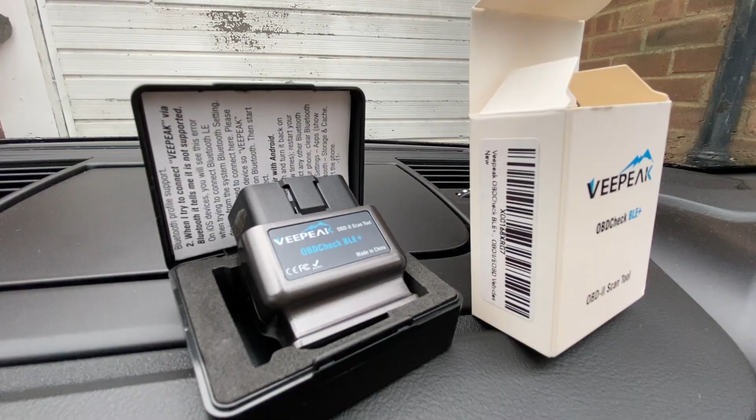From the video I did for the VEEPEAK diagnostic tool for the other two cars, the Land Rover and the Renault, a few people have asked would this work on the Giulietta.

Normally what I use is the multi-ECU scan tool, connected to the laptop through the leads, out the back of the OBD port down here. But I thought for now, let's give it a go and see what we can do. This is obviously quite a cheap tool, only about 30 quid I think, something like that in the sales, or £40 something full price. So what do you get, value for money? Will it work on your Giulietta? Let's have a look.

Just as I did in the previous video, I'm going to have to use this phone that I'm using for videoing for the diagnostic app. So basically I'm going to need to screen record on this phone, and then what I'll try and do is narrate over the top of it.

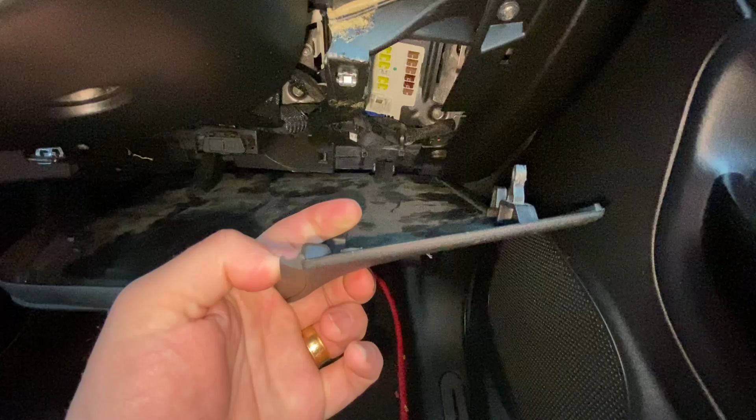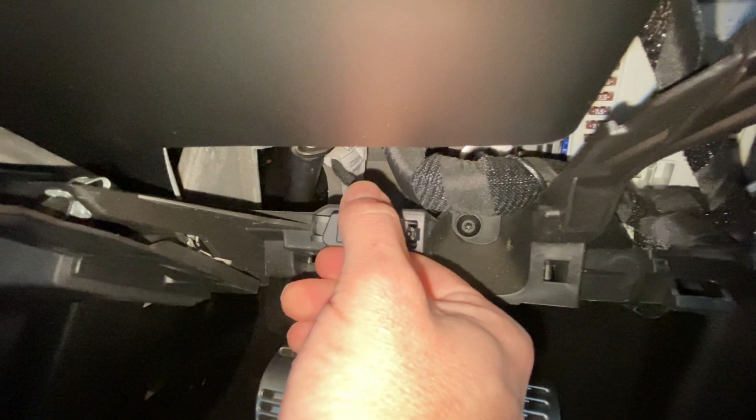Okay, so firstly let's get the tool plugged in. Down here by your knees, you've just got this panel with 1, 2, 3 clips. I've actually already removed mine once already, so I'm just going to pull this away. There you go, you can see where those clips go in, 1, 2, and then the third one just over there. They go into those kind of silver retainers, and then that just comes away. And then hopefully you can see just there is where the cover for the OBD port is.

So what I'm going to do now is just open the app and add this car in. That's the first step we're going to do - go into the app and add the new car.

Okay, so we're using the car scanner app. Top right, go into settings, and you can see the top option here is my cars. We're just going to tap on that, and you can see the 2 existing cars that we set up previously. Top right again, we've got the plus button.

So we're going to click on plus, and then the first thing we can do is just give it a name. We'll conveniently call this one Giulietta. The second point we need to do is just add on the year, so ours is a 2011. Once you've done that, just tap on the car to highlight it grey, and then we should be able to select car, and that will take us back to the menu.

Okay, great. So with the car added, what we're going to do now is just take the key and get it in the ignition, turn it on. Just to that point, we're not going to start the engine, we're just going to leave it there, and now we can go back into the app and configure the connection settings.

Okay, so the first thing we need to do is then just go into the connection settings. So Bluetooth LE is the option that we need for this dongle, connecting it through the iPhone. If you've got an Android, it's slightly different. The next one is connection profile, so we're just now going to click on that profile, and that's where we set up the car.

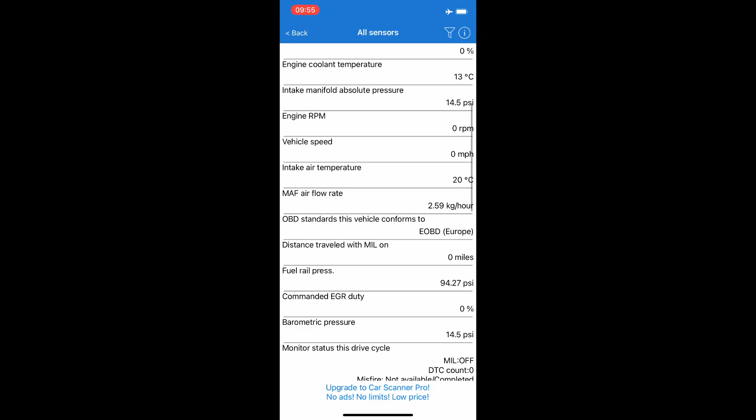Coolant temperature and all these strange random things, bits of information, useful statistics that we can see coming in, and the other points that we've got as well about fuel consumption being used and all those sorts of good things.

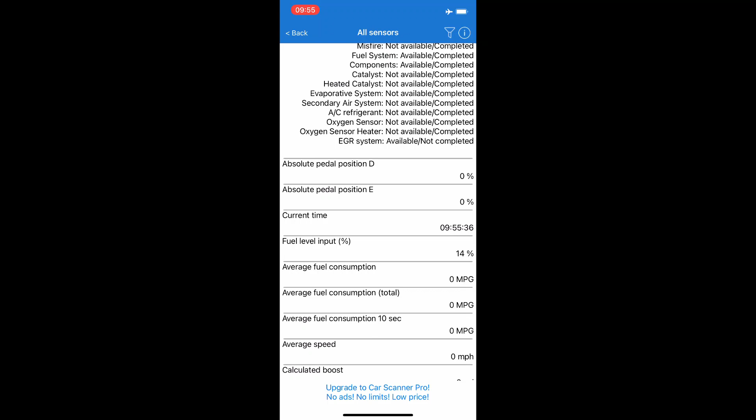Current time there as well, 9:55. I believe that's taken from the app and not from the car, because it's actually slightly 1 minute off in the car at the moment.

You've got the option there as well of distance to empty and calculated cost of the fuel used and price. What you can actually do is go into the app and add in the cost of the fuel that you're putting in, and it will actually work out for you the cost of a particular journey.

Next one, middle left, diagnostic trouble codes, or DTCs.

So this is the one that this tool is really all about. We're going to go into that now, select on the diagnostic trouble codes. That's where we're going to try and start looking at and reading any of those fault codes that you might have on the system.

On this one, it actually tells us what those fault codes are, what type you get - stored DTC, a pending one, or a permanent one. So we're going to go and just read it now. Bottom, and there it says read.

This is where it's slightly different on this one compared to the others. It's given us different sliding options, 1, 2, 3 or 4, about how far and how deep you can interrogate the car to understand what sort of information you're trying to see. For example, if you had a fault code up, you might interrogate it on this low level number 1 but it didn't give you any fault codes, so you might need to go up to 2, 3 or 4 as it comes up there, and it gives some messages about what it should and shouldn't be used for.

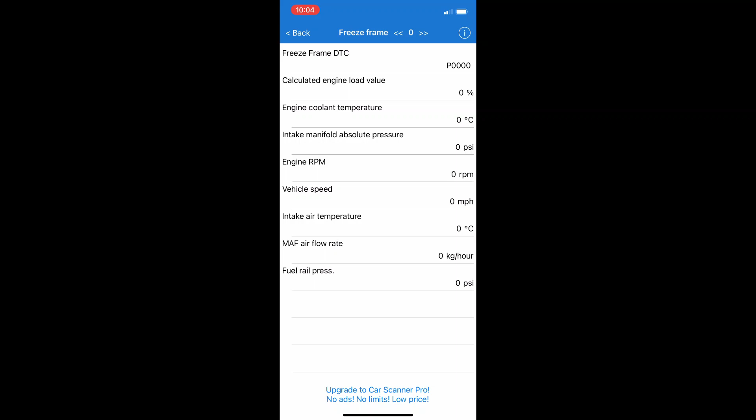Next one we've got is freeze frame. This is, as it says, about information on detecting any issues, and it will actually be able to provide you with the information that you've got up there. Because the engine's not running again, there's not too much information coming up.

Next one, middle right, non-continuous monitors, you can see it's reading down the bottom, the blue bar slowly going up. I'm not going to bore you with waiting for this blue bar to go all the way up to the end, and we'll come back out of that and go into the next one, which is acceleration tests.

So this one's quite interesting. This is actually live information for live acceleration. If you were trying to do a test, see how fast your car can go from 0 to any of those speeds, it will actually do it real time for you. As soon as you start accelerating, it starts counting up and stops automatically.

Next one, emissions tests. We can see here the components relative to the emissions, as they come through, what's passed, what's not passed. But I'm guessing some of these points aren't passed because the engine's not running, so there's none of that data coming in for it to look at.

The last one there is data recording. This is where it gives you information, or the stuff that you may have saved the files for before, on any of those other points. So that's all those up for now.

So what we can do now is just look to disconnect, I think, from the car, and we can then maybe start the engine perhaps. Just hitting disconnect, and there we go, we're now disconnected.

Okay, so having disconnected from the car, what we're now going to do is start the engine. That's all I'm doing now, just taking the key and turning it on, starting the engine so the engine's running. Once the engine's running, we're just going to hit connect again, as we've done there. Straight away it's given us a successful connection, which is fantastic. It's really good, straight into it really quickly.

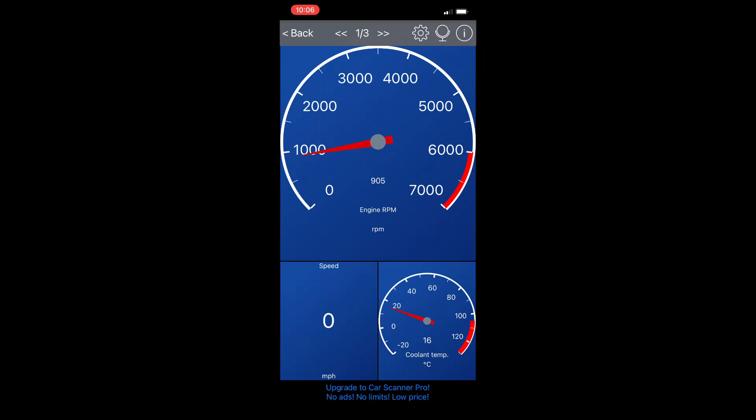And then we can go through again, top left onto the dashboard, and we can see a bit more live information because we're actually getting some interesting data. You can see the engine RPM there. If I just hit the throttle a couple of times, you can see that moving up and down.

Sliding left, a bit more information. Because the vehicle isn't moving, we're not getting any speed, average speed, or distance traveled. But if we were running with the diagnostic tool plugged in while driving, we'll be able to see that information coming in live as well. Sliding left takes you back to the first screen, and then just tapping on it we go back, and that takes us back to the menu.

Back into top middle, live data, clicking on the combine again. It remembers your last options, your last settings, should we say. So it's got those two, so we'll just leave those on. We can see here that obviously the voltage now looks a whole lot different.

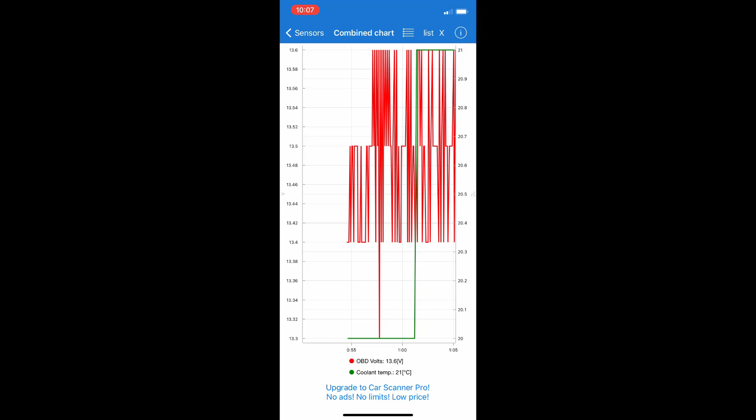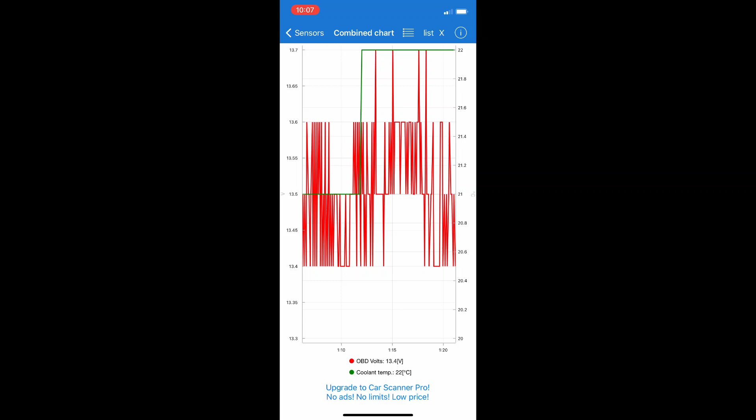It's not the 11.5 volts we had, it's getting more power to it with the engine running. As much as it looks like it's fluctuating like crazy, it's actually only going up about 0.1 to 0.2 of a voltage, so that's not too bad with the engine running. As more power comes in, or if we blipped the throttle driving fast, that would probably smooth it out to a much flatter line.

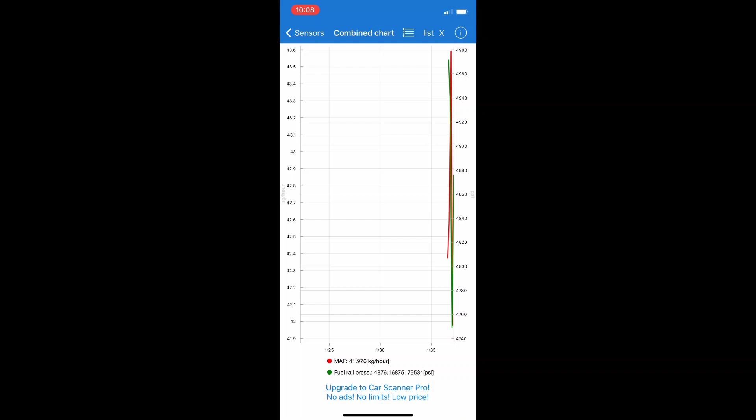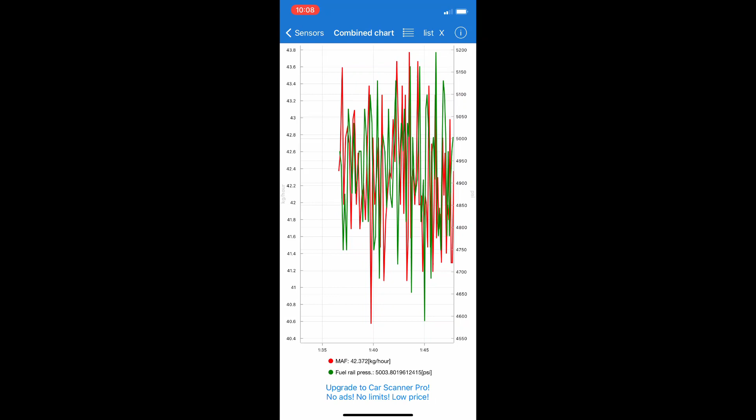Just deselecting those two, we'll look at another couple of options, remembering we can only select two at a time. So we'll look at the MAF airflow rate and the fuel rail pressure. Again, just like I was saying, the data coming in looks erratic as crazy as you like, because we're sitting there idling, so it's kind of a really zoomed in view.

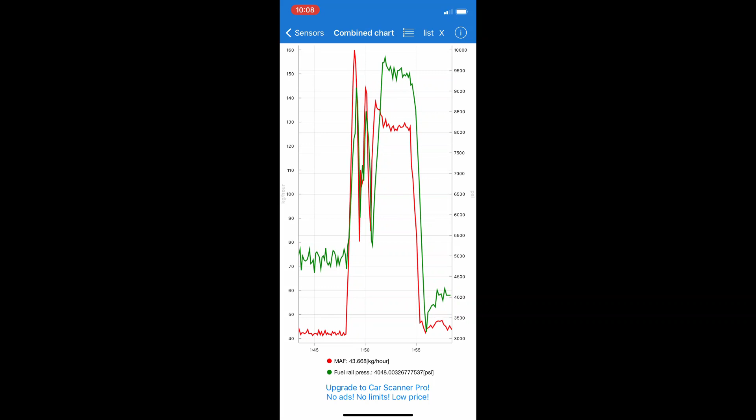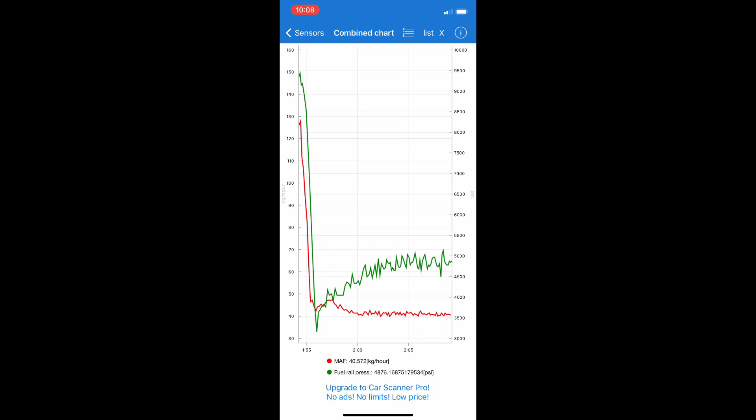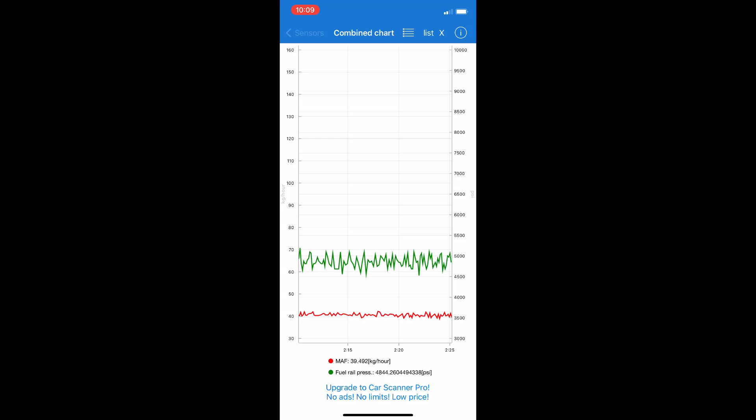As soon as you put some pressure on it, start to use the throttle and get some revs going, it's sucking more air in through the MAF, and you can see what looks erratic actually starts to smooth out, those lines come in. As the engine starts to warm up, some of the pressures start to build up. The MAF is fairly consistent with the amount of air coming in while it's just sitting and idling, but the fuel rail pressure has now built up to where it probably should be, and it's fluctuating just a little bit between those measures.

Turning those two off again, just coming down, looking at more options that we can potentially look at, something useful and interesting. We'll look at distance to empty and the fuel used.

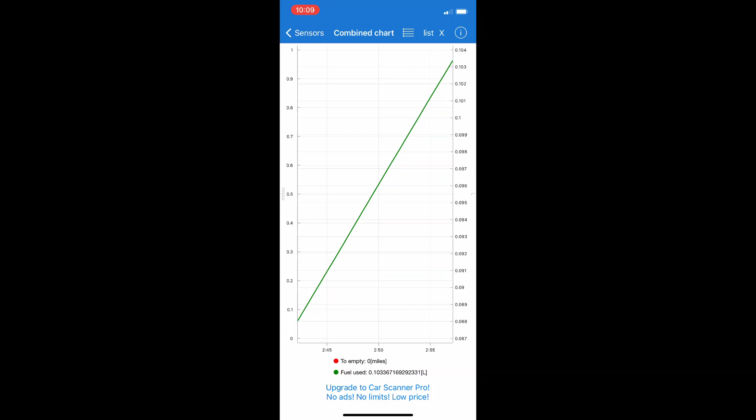So distance to empty isn't giving us a reading. Maybe that's because we've not got any costs or something like that in there, or maybe it's just not actually able to read it. And then fuel used, the longer the engine's running, we're using more and more fuel, so that's why that's going up as the time increases.

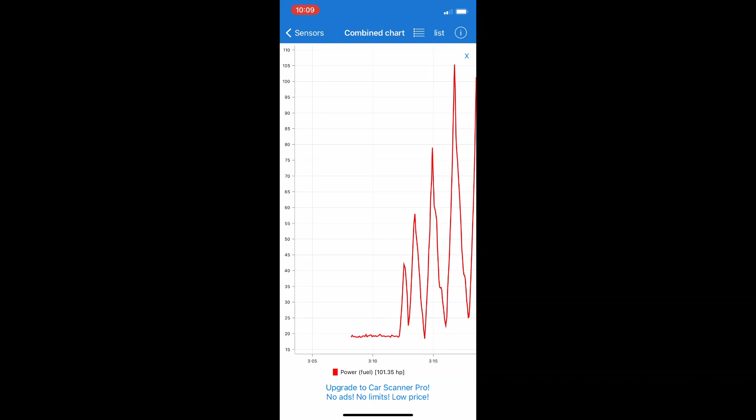Deselecting them, we'll just have a quick look to see what else we've got. I think maybe this one, instant power. So we can see here it's given us a horsepower reading. If I just blip the throttle a few times, you can see that power measure going up, showing how much power is being created.

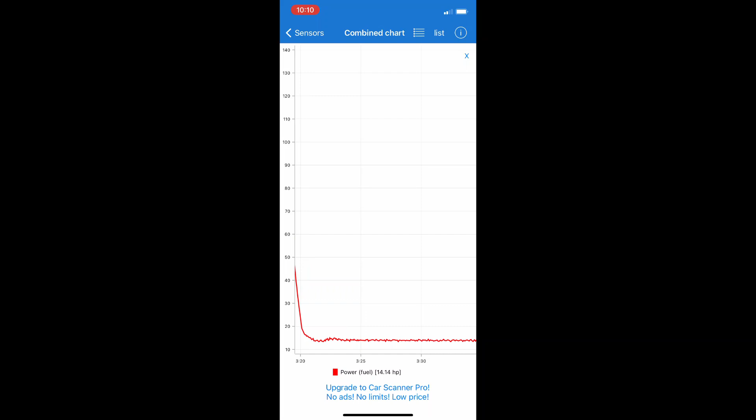How accurate this is, I'm not entirely sure. Obviously it's not going to give you information as live as sticking it on a rolling road for a dyno or something like that, but it's interesting to see the data coming in nonetheless. Try and give it one more little blip, a little bit harder, and up to, what do we get there, 150 horsepower. So that's kind of coming out of the car.

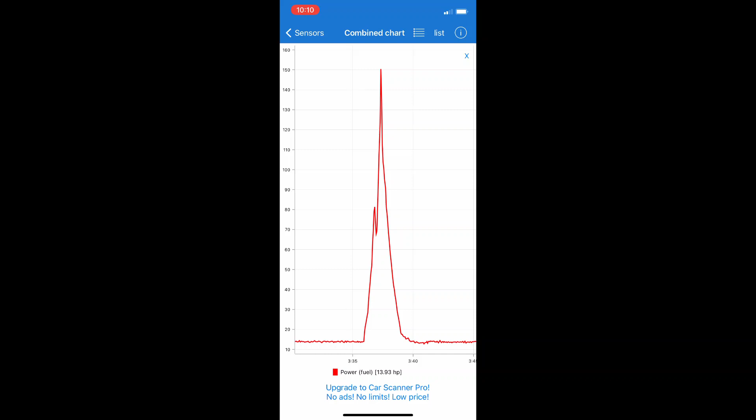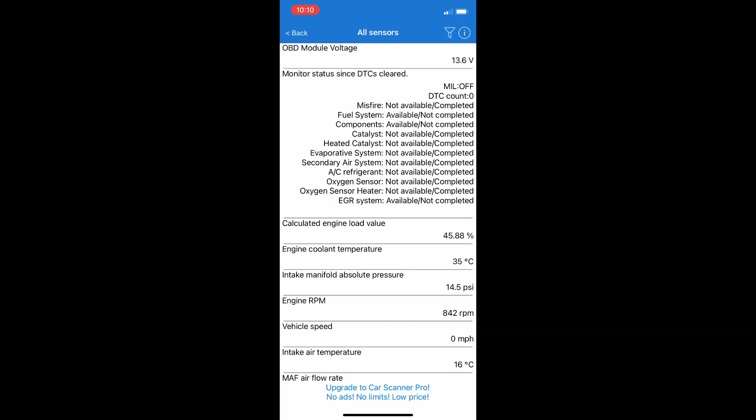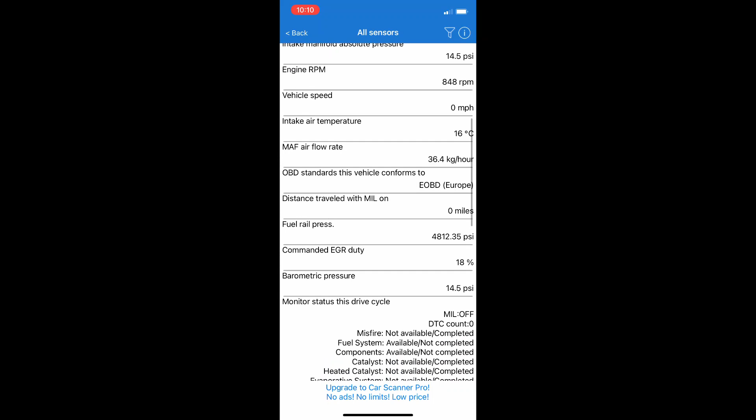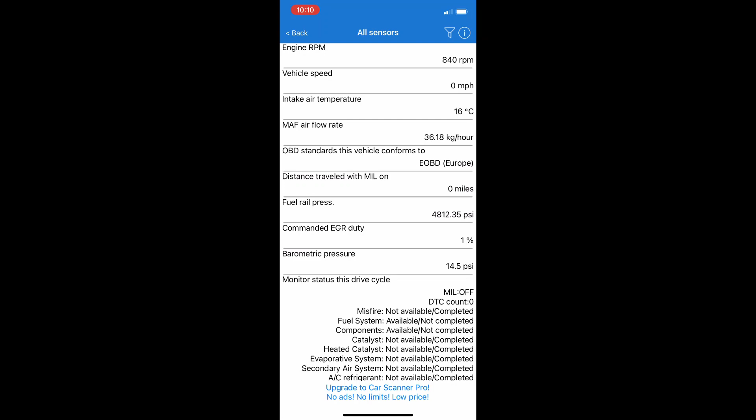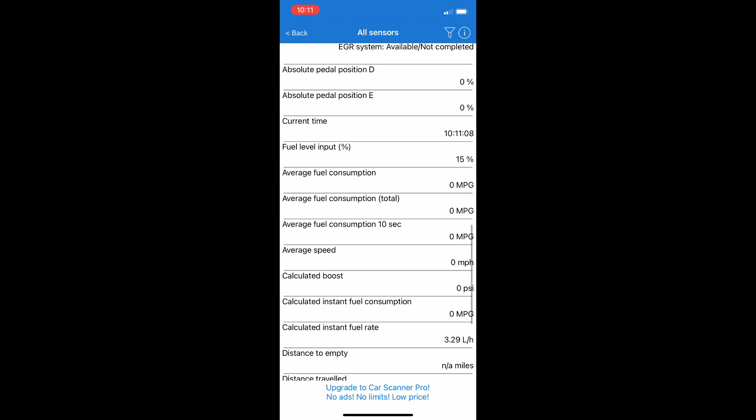You can see we've got a few more bits of information now coming in, again like the average fuel cost and so on, just as we looked at before previously. But like I say, the car's not moving, we're not going anywhere, we're not getting any of that real worthwhile data coming in.

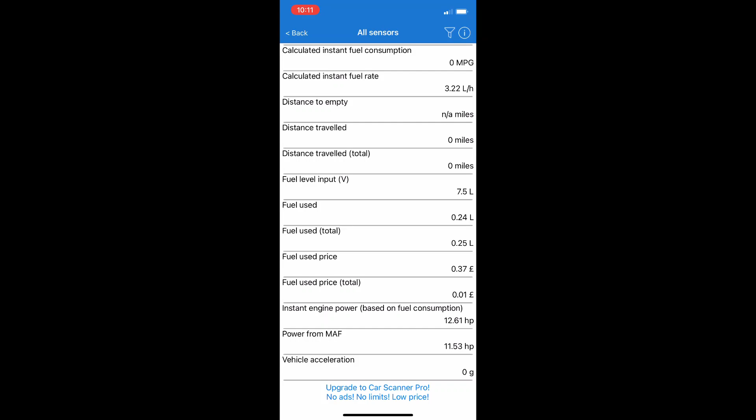I'm guessing if we were looking at this as we were driving down the motorway, it'd be a lot more interesting than it is sat here on the driveway for the time being. But it's interesting watching it and seeing it coming in there, coming back up to the top, coming back out. I think the next option we looked at was just disconnecting from the car, and that's disconnected now.

Okay, so now we've disconnected, I'm just turning the engine off. There we go, and now what I can do is run down here through the keys and remove the unit. Okay, so what did we find from that?

So connection wise, it actually connected really well. Pretty happy with it, how easy it was to connect to it, how easy it was to set it all up. No issues with that whatsoever.

So information wise, actually being able to go into it and interrogate the systems, a fair bit of information to be fair, but not really to the extent that we would be hoping for, I don't think. I think it's really good for getting the fault codes up, so being able to scan all the systems so that you can then diagnose and see exactly what's wrong.

If you had an engine management light come up or some sort of warning on the dashboard, you'd then be able to use it for plugging in and working out what that fault code was. Beyond that, I'm not really sure it's that capable for this car.

Maybe if you had, I think in the option that we saw, the 1.4 Multiair, it might give you a little bit more information for the Multiair unit and so on perhaps. But obviously from our perspective, where we've got the MES software, the normal stuff that we use connected to the laptop, that gives us a whole lot more information for, in essence, what realistically isn't that much more money.

Convenience wise, obviously this is great, it's really small. You can fit that, leave it in the carry case that you've got there, and just pop it in the glove box and take it with you, so wherever you go, you've always got the ability to diagnose a fault and find out exactly what it is, if it's something you can fix on the roadside, or if you're away on holiday or something, you can order a part online perhaps.